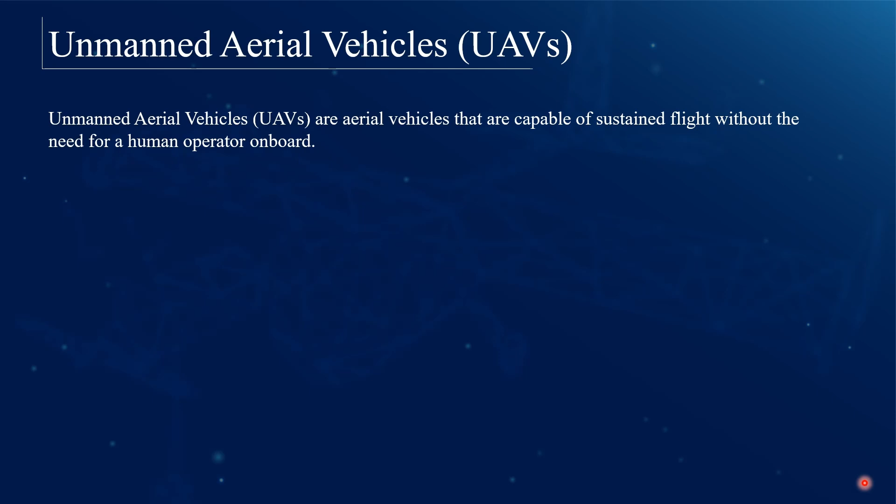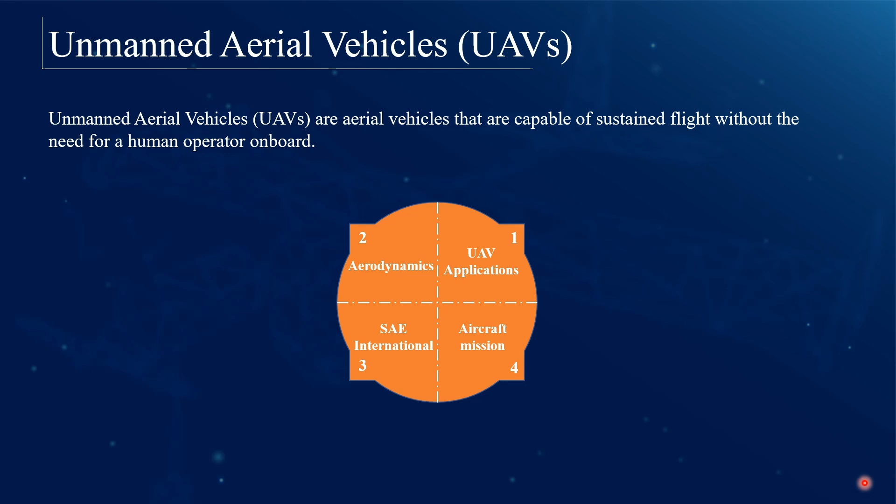So let's get started. What is the unmanned aerial vehicle? Exploring the definition of unmanned aerial vehicle can expose us to various definitions in the literature. Simply put, a UAV is an aerial vehicle capable of sustained flight without the need for a human operator on board. Within this webinar, we shall explore diverse applications of the UAV, delve into some basic aerodynamics to enhance our grasp of wing design procedures, gain insight into aircraft missions, and ultimately explore the wing design procedures in a simple yet comprehensive manner.

Exploring the world of unmanned aerial vehicles, we uncover a range of impactful applications that highlight their significant influence in different areas. From detailed path planning to firefighting and versatile roles such as environmental monitoring, railway inspection, and cargo transportation, UAVs provide us with air superiority.

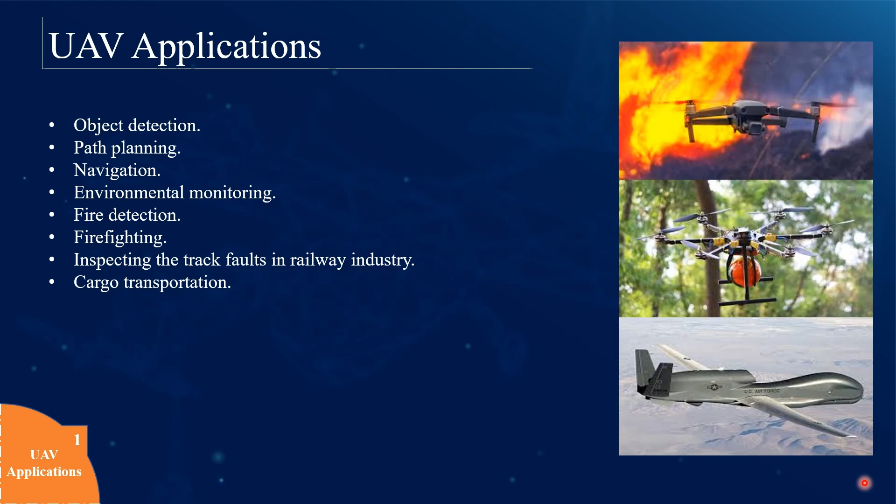To design an unmanned aerial vehicle, we need to dive into the essentials of aerodynamics. We need to know more about the forces that affect our airplane in the sky, which are weight, lift, drag, and thrust. Starting with weight, gravity pulls airplanes toward the center of the Earth, and this force changes during the journey due to fuel consumption. So to defy gravity, an airplane generates the lift force. This force comes from the airplane's motion in the air and it counters the weight. Lift is perpendicular to the plane's path and is mainly generated by the wing.

The third force here is drag. As the airplane moves in the air, it experiences a resistive force called drag, and factors like the shape of the airplane and the airspeed dictate the drag force. To overcome drag, we need thrust produced by the engines. Thrust power depends on various factors like engine type, number of engines, and airspeed, and Newton's third law of motion clarifies the action-reaction principle behind this engine thrust. With this fundamental understanding, we are primed to explore our primary generator of lift force, which is the wing.

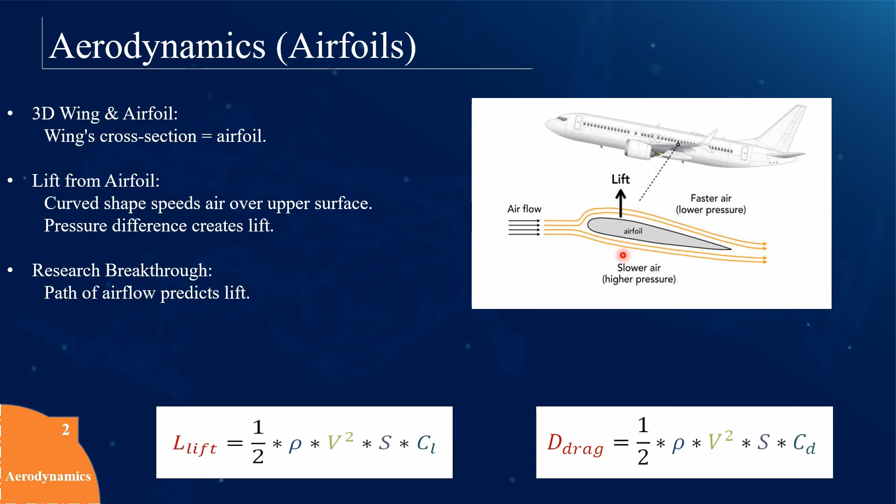So basically, the airfoil does not care about anything but to receive the right amount of airflow in the right direction, which is called the angle of attack. It's basically the angle between the airflow direction and the main line of the airfoil, called the chord line. This is the leading edge of our airfoil, and this is the trailing edge. This line here is called the chord line. The angle between the chord line and the airflow is called the angle of attack, and this angle is very important to predict our lift with high accuracy.

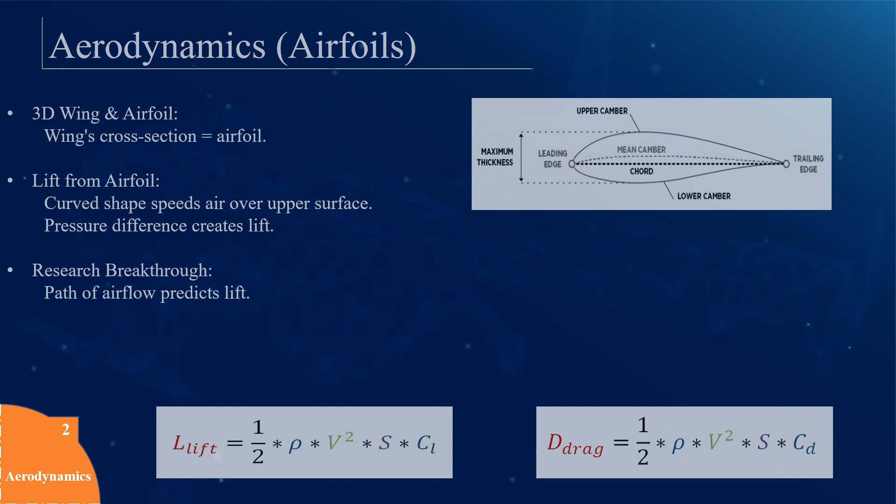So as the angle of attack increases, the airflow gradually becomes turbulent. Once exceeding the critical angle of attack, the flow on the upper surface separates from the airfoil, resulting in something called stall. This stall generates a significant rapid loss of lift force and produces an excessive amount of drag and vortices. This is crucial for aircraft safety, hence the stall will affect our selection decisions as we go through the wing design procedures later on.

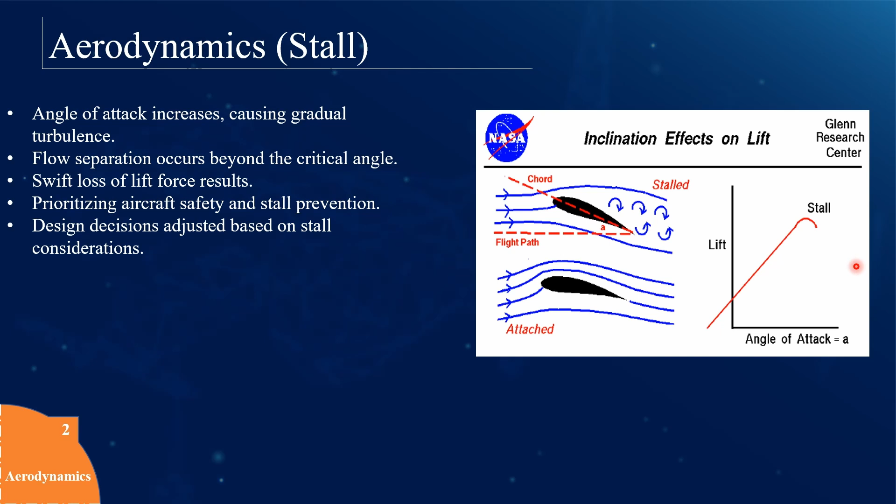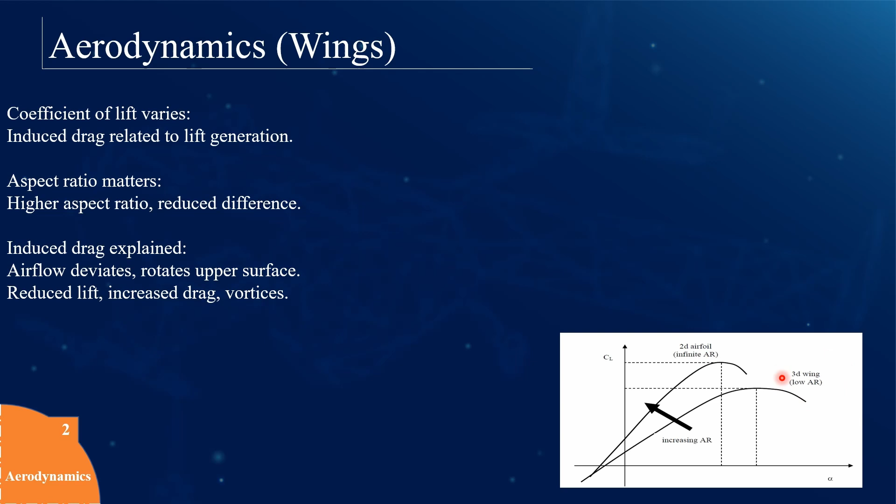So there is a difference in the coefficient of lift between the airfoil, as we can see here, and the 3D wing due to what's called the aspect ratio. So what is the aspect ratio? The aspect ratio is mainly the length of the wing, which is called the wingspan, to the chord. So mainly it's a ratio between two lengths. As we can see, the more we have a higher aspect ratio, we will have a coefficient of lift more similar to the airfoil.

So induced drag refers to the phenomena of the airflow escaping from the normal path, which is from leading edge to trailing edge, and instead going toward a much easier path by rotating from the lower surface to the upper surface of the wing, as you can see here, causing a reduction in lift force and an excessive amount of induced drag.

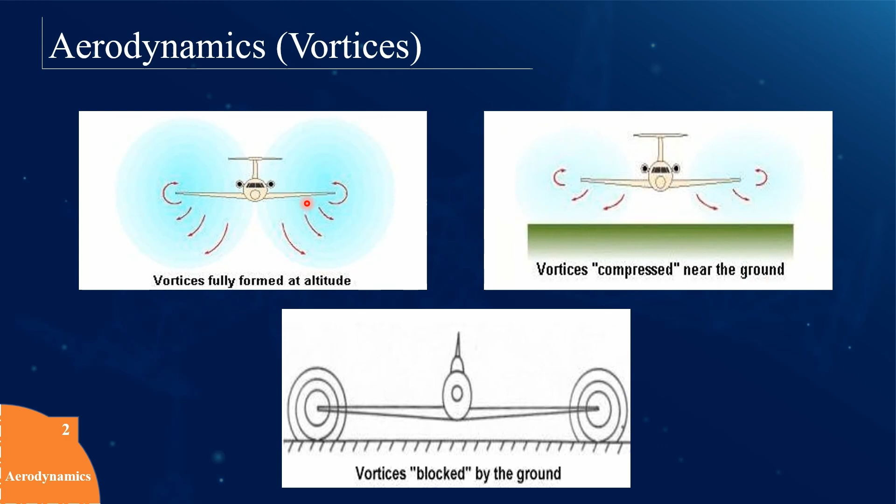This induced drag and vortices are fully formed at higher altitude, but once an aircraft is approaching a runway, the vortices are gradually blocked. So this is the aspect ratio. The aspect ratio is mainly the wingspan over the chord.

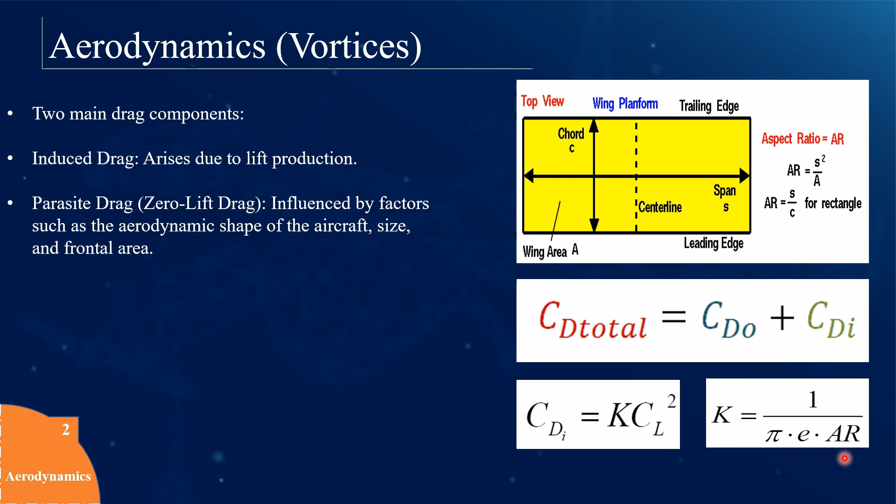This is the total drag of an aircraft, represented by two types of drag. The first is the parasite drag, also known as zero lift drag, influenced by factors such as the aerodynamic shape of the aircraft and the size and frontal area of the aircraft. The second type here is the induced drag, and it's a pretty significant drag. This is because it comes with the lift generated to the power of 2, and as we increase the aspect ratio, we decrease the induced drag.

Enough aerodynamics. Now it's time to know more about our aircraft mission as we participated in the aero design competition organized by the Society of Automotive Engineers.

The Society of Automotive Engineers is an international organization founded in 1905, mainly to solve common technical problems and develop engineering standards. Nowadays, the SAE organization provides a set of various competitions to enhance and develop the skills of engineers in solving real-life problems. Deputized judges from Lockheed Martin were involved in evaluating different stages of the competition in our aero design competition. Big companies like SolidWorks, MATLAB, Siemens, and many others participated as sponsors for the event.

As we mentioned earlier, SAE competitions cover a wide range of engineering fields. Our team has been participating in the aero design competition since 2013.

So the mission of our aircraft is to design an aircraft that can operate from short runways to carry spherical cargo as well as boxed cargo, with some limitations such as maximum wingspan of 3 meters, a maximum takeoff distance of 30... (limit), the power limit is 1000 watts, and fiber-reinforced plastics are prohibited except for the landing gear parts.

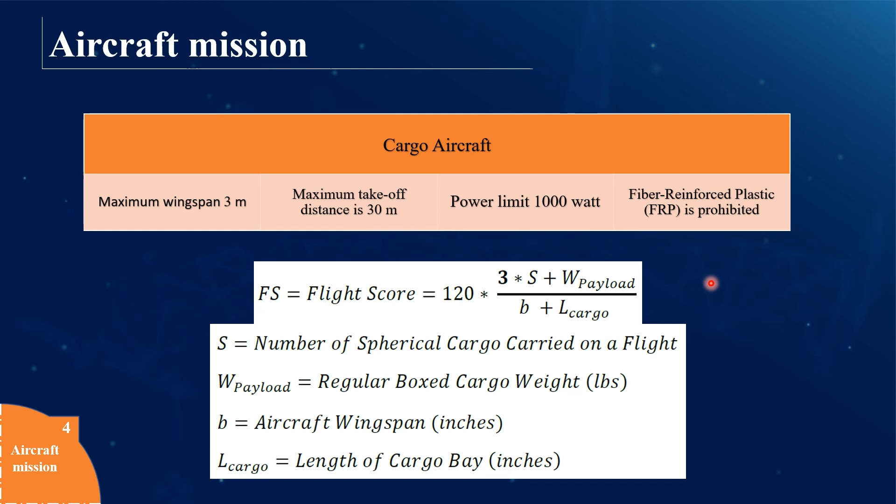A monoplane with a tricycle landing gear, a propeller, and a conventional tail - allow me to introduce our aircraft Oqab, named after the eagle in our national flag.

Although I have done the conceptual design for this aircraft, our primary focus here lies on the wing design process, and that's exactly what I'm going to delve into in the next slides.

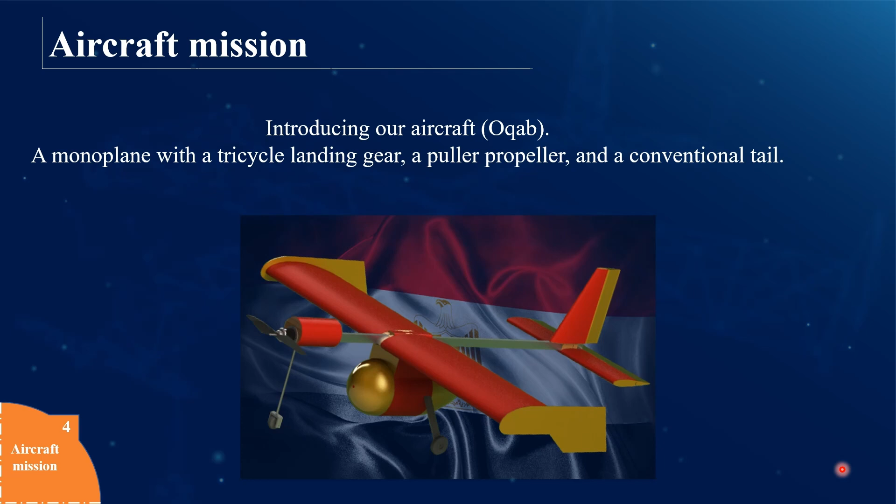The first phase is the conceptual design. Here we take our time to understand the requirements and the mission of our aircraft so we can know what constraints are on the design. The conceptual design phase consists of selection of the number of wings, the vertical location, and the wing planform shape.

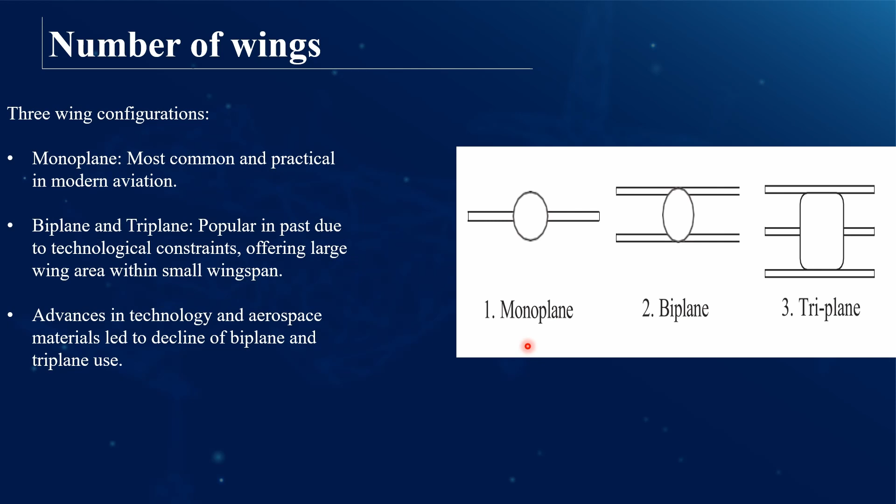Starting with the number of wings, there are up to three possible configurations: the monoplane, the biplane, and the triplane. Monoplanes are the most common and practical choice in modern aviation, but this was not the case in the past due to technical constraints such as limited knowledge about airfoils and material compositions. Therefore, biplane and triplane wings gained popularity during World War I and World War II, as they offer a large wing area packed into a small wingspan, as you can see here. Eventually, advances in technology and aerospace materials led to the decline of these types of wings.

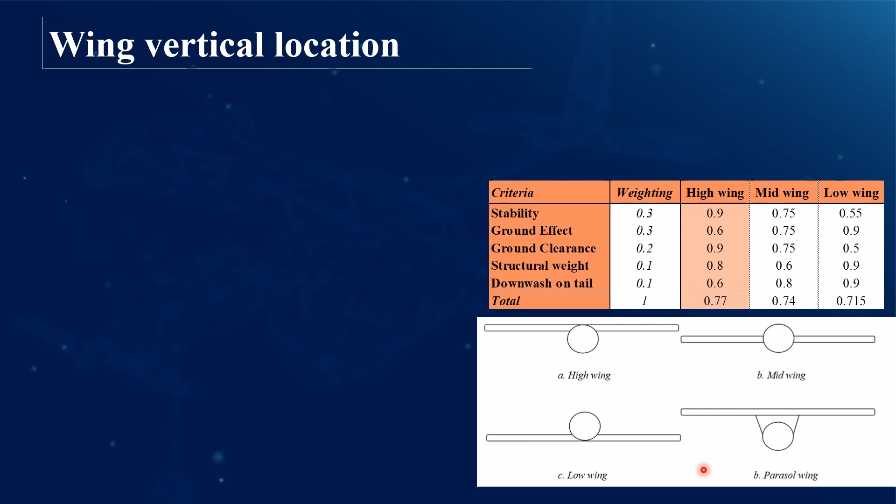Moving to the wing vertical location, there are four types of wing mounting positions: mid, high, low, and parasol. To select the most suitable one, we can perform what's called the trade-off matrix.

This is the trade-off matrix right here. Starting by listing the criteria we are going to design our aircraft based on, which affect our selection significantly. These criteria can differ based on the mission requirements and the capability of the manufacturer. Then we give a proper weighting for each criterion, giving the most critical criterion the highest consideration, as you can see here. So stability is our main consideration.

So it's going to take 0.3, and you may notice that the sum of this column is 1. Basically, the weighting gives the highest value to the most critical criteria.

Then we list our candidates, in our case the high, mid, and low wing. Based on our knowledge and reading in references and papers, we continue to fill in the values in the table. For example, the high wing has higher stability than the other candidates, the mid and low wing, so it takes the highest value, 0.9, compared to the others, 0.75 and 0.55. We continue filling up this table until we reach valid values for all candidates.

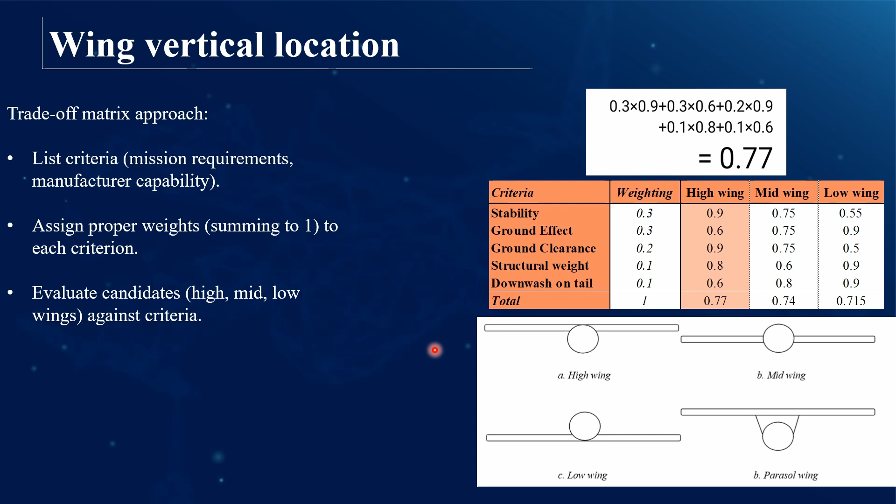After filling the table, we multiply the weighting from the first column with the candidate values. So we multiply 0.3 with 0.9, then sum the other line after it, 0.3 and 0.6, and so on until we reach the end of the table to give the total for each candidate. Just like that, we can make a highly informed decision that takes into consideration all the criteria that may affect our design later on.

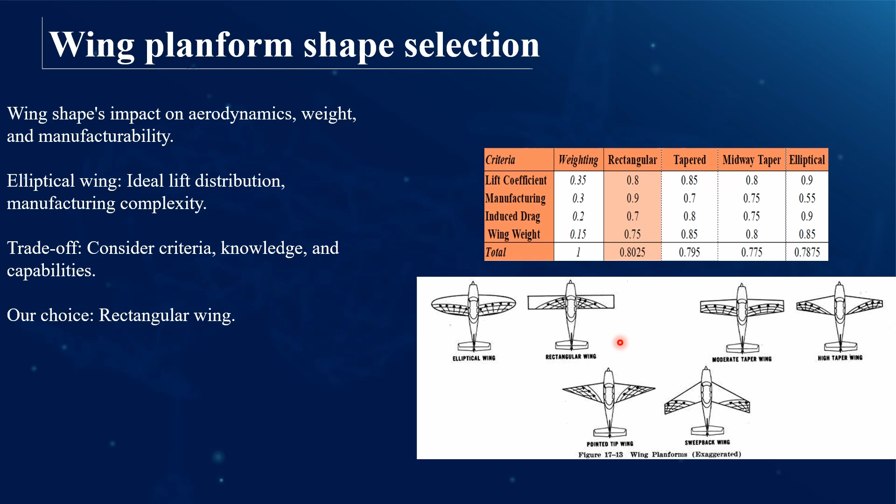The second selection process we need to make is the wing design shape, as it plays a pivotal role in aerodynamic performance. While the elliptical wing boasts an ideal lift distribution, it has a very complex manufacturing process. Consequently, in selecting the optimal wing shape, each criterion must be carefully weighed, considering both knowledge and manufacturing capabilities to ensure an informed decision. For our case here, we have selected the rectangular wing, and we will deal with its cons later on in the detailed design phase.

The following phase is called the preliminary design phase, and it's mainly a cooperation between the wing and propulsion subteams to determine the total takeoff weight, the wing area, and the required propulsion thrust.

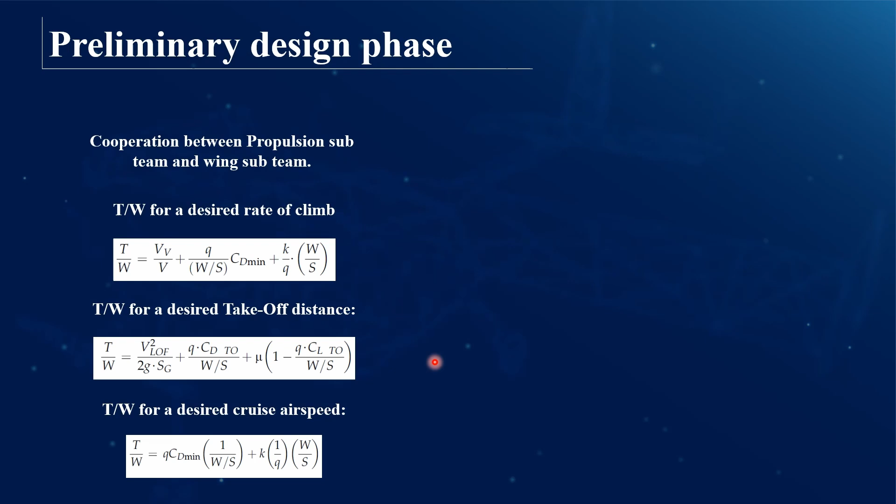This can be done based on mission requirements, as we mentioned in the previous slides, such as maximum takeoff distance, and we can use what is called a constraint diagram to help us select the design point. You can review all the equations here in detail in our paper, which I will mention later on. After applying all constraints, we select our design point with the lowest thrust power required and the lowest wing area.

Each equation contains the thrust referred to by the symbol T, the weight referred to by the symbol W, and S here refers to the aircraft wing area.

After that comes the detailed design phase, which consists of two selection processes: the airfoil selection and the wingtip device selection.

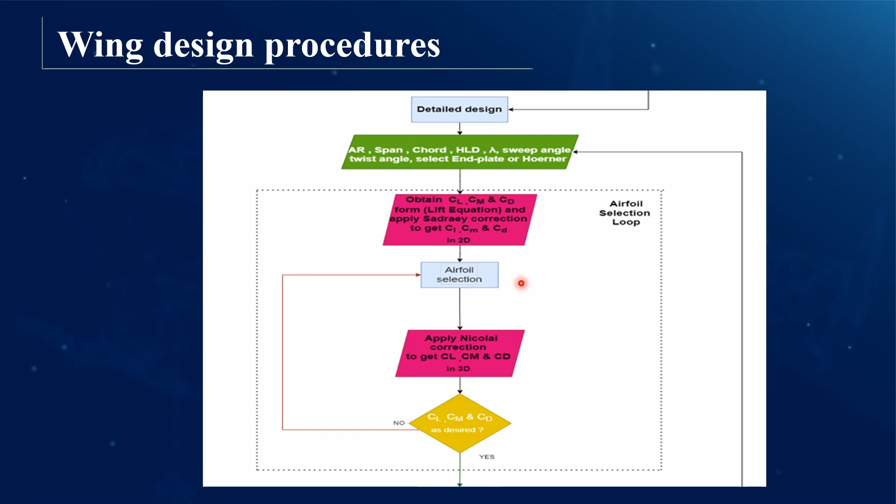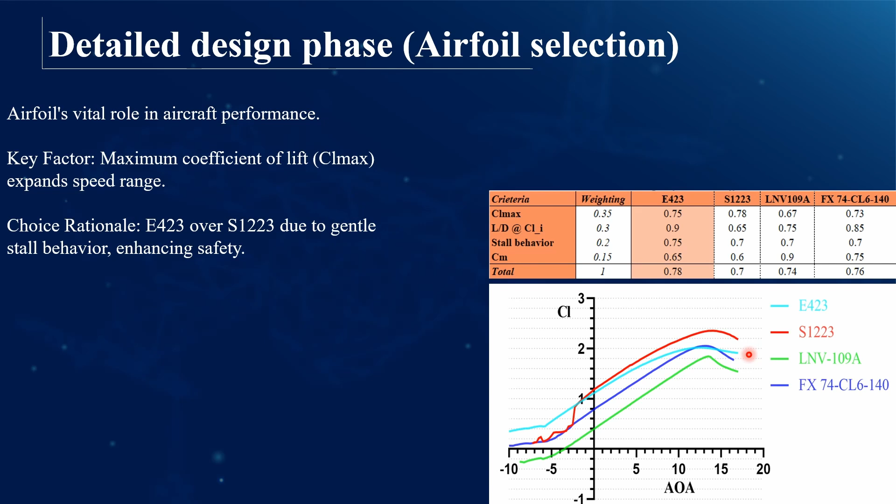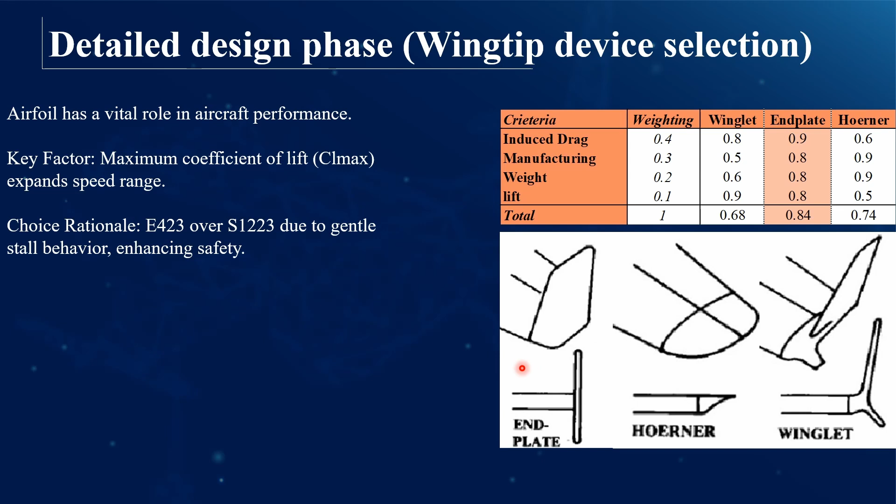The primary function of the wingtip device is to minimize the induced drag, resulting in enhanced aircraft performance. It's worth noting that the winglets here can be challenging in the manufacturing process, and the Hoerner does not have a higher impact on induced drag compared to the other candidates. Ultimately, our trade-off matrix reveals that the end plate stands out as the optimal choice for our wingtip device.

Moving on to the performance analysis, this is the final phase to check the performance of our aircraft by performing a safety analysis and predicting the change in payload with respect to weather conditions.

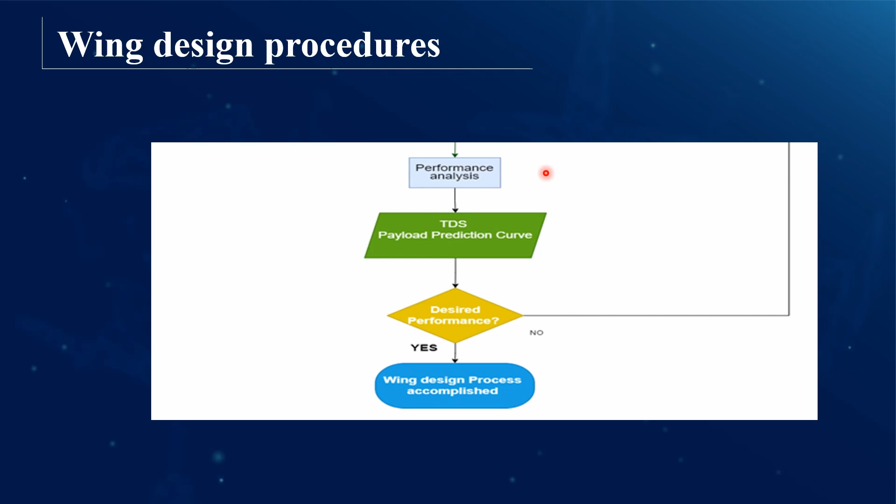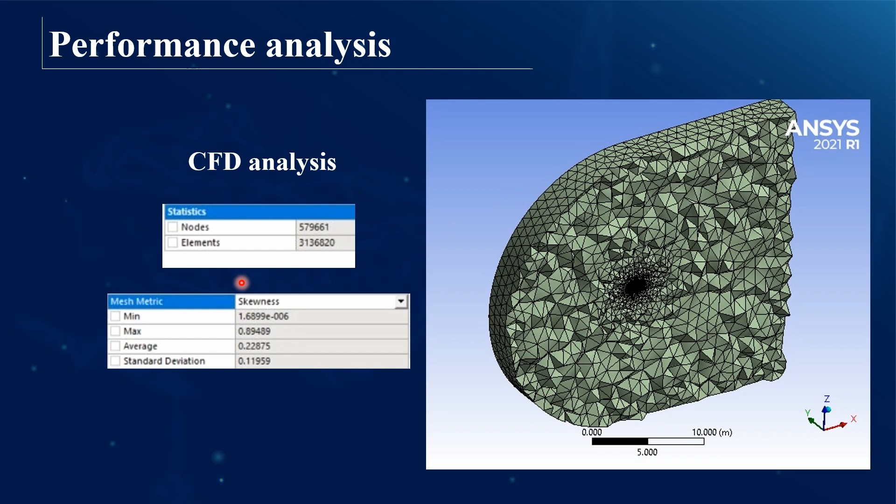Here I must give credit to my friend Muhammad Alam. He did this CFD analysis, and as you can see, he did it with high mesh quality to ensure accurate results. The CFD analysis confirmed the predicted performance of our aircraft wing regarding the coefficient of lift, induced drag, and parasite drag.

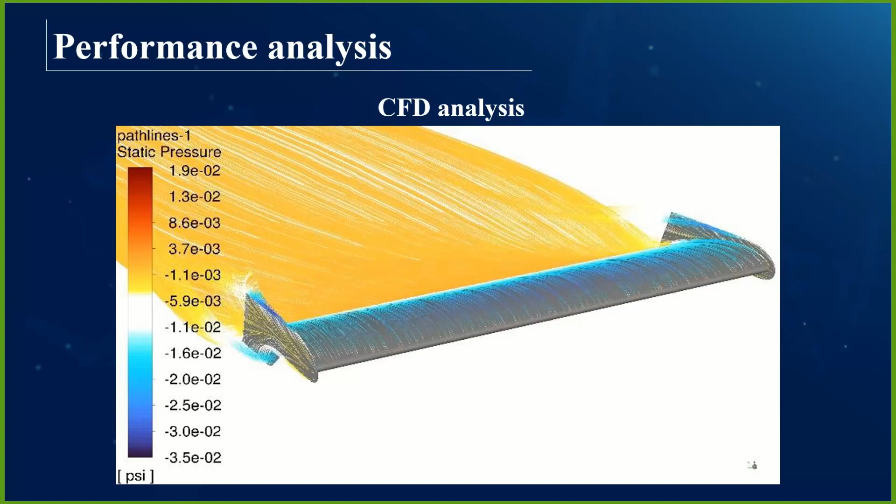Now we are going to do the last process in our aircraft wing design procedure, which is the prediction payload curve. First of all, why do we need the prediction payload curve? Simply put, the performance of the aircraft changes with respect to different weather conditions.

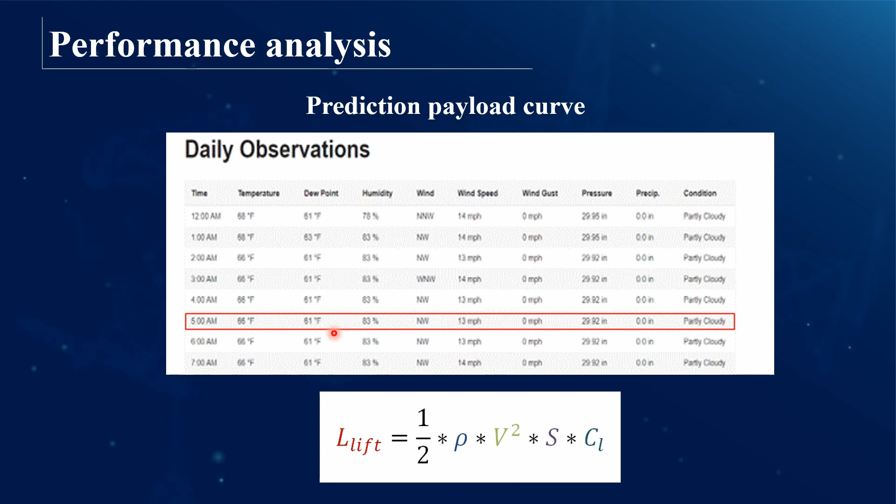Using the air density, we calculate another term called density altitude, which takes into account all parameters that affect the performance of the aircraft wing. Density altitude is inversely proportional to both the air density and the aircraft performance. In simple words, the higher the density altitude, the lower the aircraft performance.

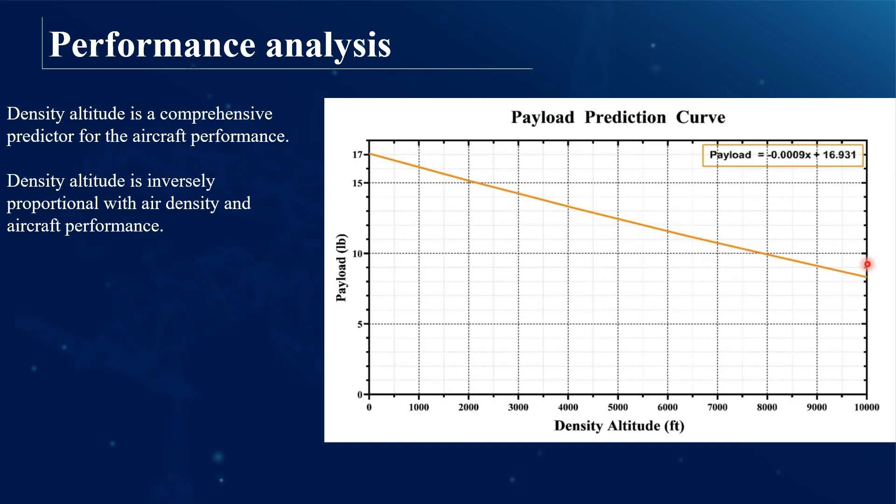And just like that, we have finished the wing design procedures from the aspect of aerodynamics. Then comes the structural design followed by the manufacturing process.

As you can see, we have a pretty strict environment when it comes to manufacturing, fighting with the wing spar while wearing safety gear.

Who wouldn't be wearing those? A barbecue party, of course, why not? Studies have shown that academics have an increase in the levels of stress and anxiety. Therefore, it's important to have enjoyable and positive outlets for that stress. So, personally, having fun is an essential part of the journey to make unforgettable memories and overcome challenges.

Now it's time to spread wings. Here is one of our flight rounds in California. The judge ensures that the aircraft is positioned at the starting line to measure the takeoff distance accurately.

After 30 meters from this starting point, a second line indicates the takeoff distance limit, as you can see in the upcoming seconds. Launching the aircraft.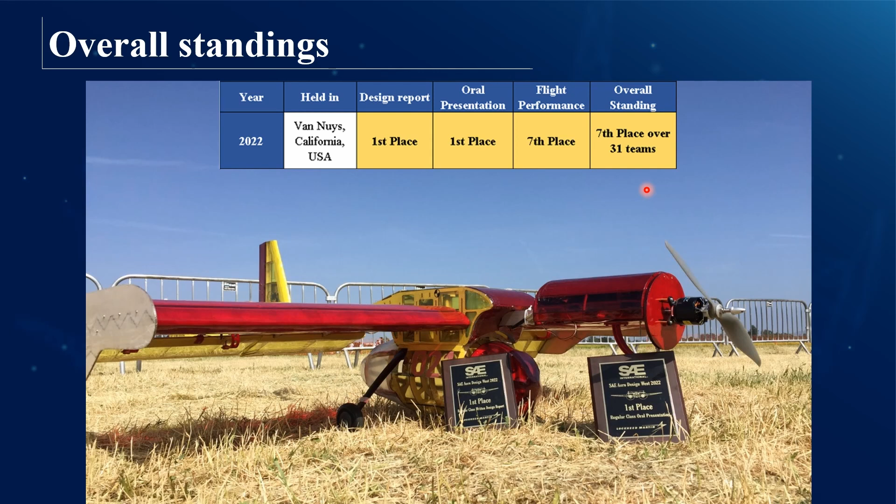Our aircraft Uqab has won first place in the design report and the oral presentation, and secured seventh place in flight performance and overall scoring, competing with over 31 competitor teams. These accomplishments stand as a testament to the tremendous efforts of 9 generations since the establishment of our team. This journey would have been immensely challenging without their invaluable contributions, for which I am forever grateful.

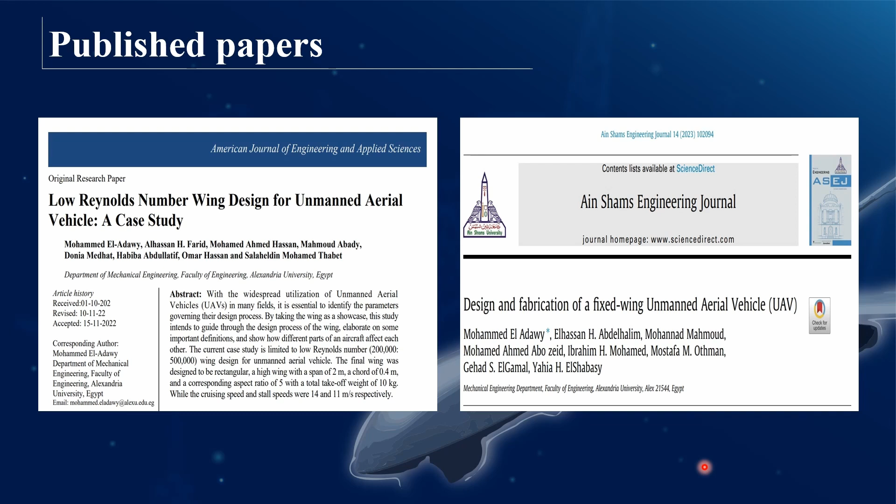In a 3-year journey filled with challenges, we managed to publish 2 research papers. The first outlines a step by step approach to designing the aircraft wing, while the second documents the entire design journey of our aircraft Uqab. For those seeking more in-depth knowledge of the wing design procedures, or a comprehensive overview of our aircraft Uqab, I will share the link for both papers in the chat. You can definitely check them out.

Now it's time for questions. Your engagement is valuable, please feel free to share any questions you may have.

Okay, thank you, Mr. Elhassan, for this nice presentation. Actually, I'm also from Egypt, but I'm amazed by your presentation. I know that Alexandria University is one of the best in Egypt, but I didn't know there is such good, efficient work students can do with our universities. So I'm very pleased to have you as a guest in our webinar. It's my pleasure, thank you so much.

All right, so induced drag has a bad effect in two ways. The first is that it reduces the amount of lift generated by the aircraft wing. As you can see here, with a much lower aspect ratio, the induced drag is much higher. Therefore, the lift of the wing is much lower than the airfoil. That's the first issue, you lose some of your capability to generate lift.

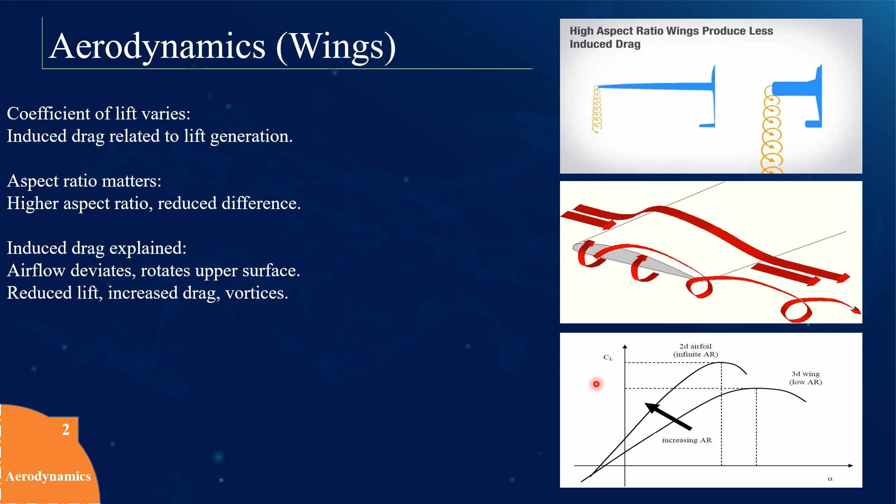The second issue is that increased drag poses a challenging situation to the thrust capabilities. The higher the drag, the higher the thrust must be, meaning you should carry more fuel, or in our case higher capacity batteries, since we operate radio controlled aircraft. Also, the lower the thrust you have, the lower the speed range you can operate your aircraft with. This is the main issue of induced drag, it affects both the lift capability and the thrust capability.

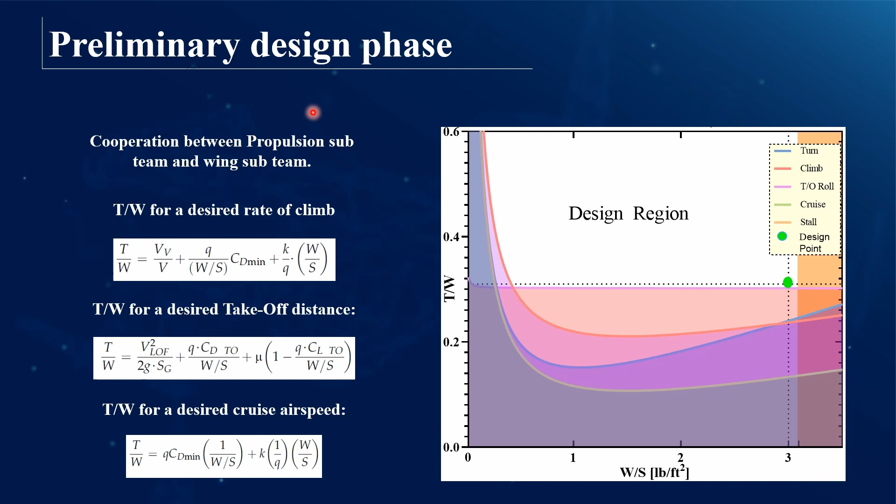Well, thank you very much for that, Professor, because that's a tremendously unifying way of making the design a step-by-step process, for engineers who are not PhDs figuring out the whole process one has to go through.

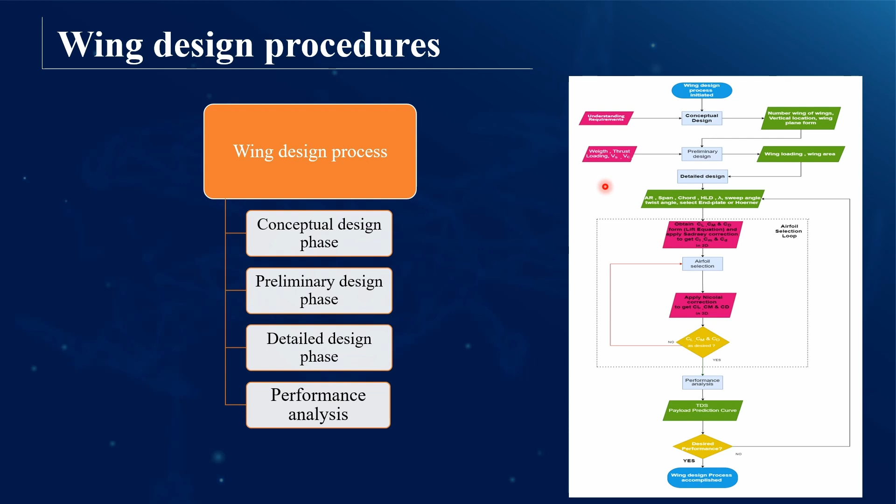I just want to be more clear, there was a flowchart that showed decision points going left and right, and you were showing excerpts of it at different times. That's the flowchart I'm discussing, not what's being shown now in the presentation. You mean this, right? Yes, that part, is that part of your low Reynolds number wing design for unmanned aerial?

Oh, that's wonderful. Excellent. Thank you very much. Thank you.

So does anyone else have any questions? Seems like no one wants to ask.

So as we wrap up, I want to express my gratitude to my teammates for their unwavering support through the entire journey, extending beyond this presentation. A special recognition is also due to Salah Thabet and Mohannad Mahmoud for their invaluable contributions that enhanced the quality of this presentation. Furthermore, I extend my heartfelt thanks to the organizers for their effort in bringing this webinar to reality. And last but not least, big thanks to the attendees whose active engagement has truly enhanced this experience. Thank you.